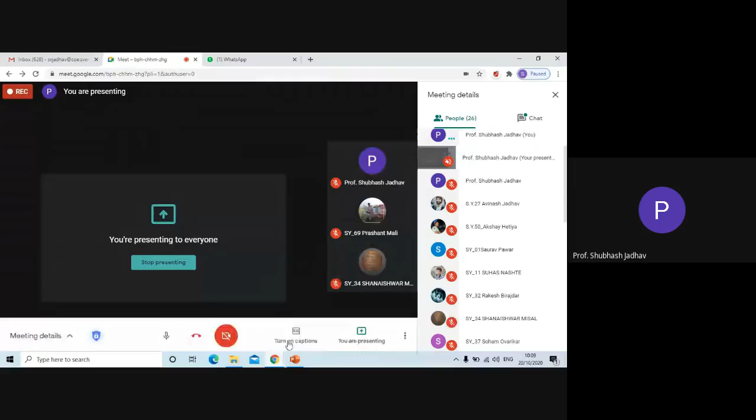So basically, in the previous lecture, we have discussed CI engine combustion, and we are going to continue. But before moving ahead, there were some students saying that due to network problem, they were unable to hear me completely in the previous lecture. So let us revise what we have discussed earlier, and then we will proceed.

So, the combustion in CI engine is our chapter number 6. Basically, this is what the combustion is, which we have already learned. It is a hydrocarbon fuel. With the help of oxidant, it is being oxidized, and the products are carbon dioxide and water, liberating some amount of heat which we require for conversion into work. So it is being represented as CH4 + 2O2 → CO2 + 2H2O + heat.

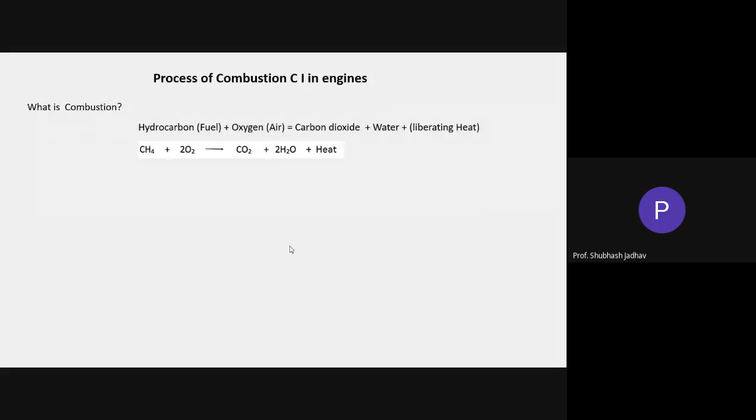There are some requirements for the combustion to happen in CI engines. Being CI engine, presence of hot air in the combustion chamber is the first requirement. And in order to achieve this first requirement of hot air, we have to use sufficiently higher compression ratio of more than 16:1. So here we mean to say we require hot air in the combustion chamber.

Now, why we require hot air? Because we are not providing separate ignition system in CI engines. Since we are not providing separate ignition system, in order to ensure that the fuel whichever is going into the combustion chamber is going to burn, we have to ensure that the air inside the combustion chamber is hot enough.

To what extent? To the extent that whenever we spray the fuel into the combustion chamber, it is going to burn automatically, self ignition. Since it is supposed to burn on its own, auto ignition has to happen. The air temperature has to be above auto ignition temperature of the fuel. So we have to increase the temperature of the air to a very high level, and for this, we require very high compression ratios above 16:1. That is the reason why we generally use higher compression ratios in CI engines.

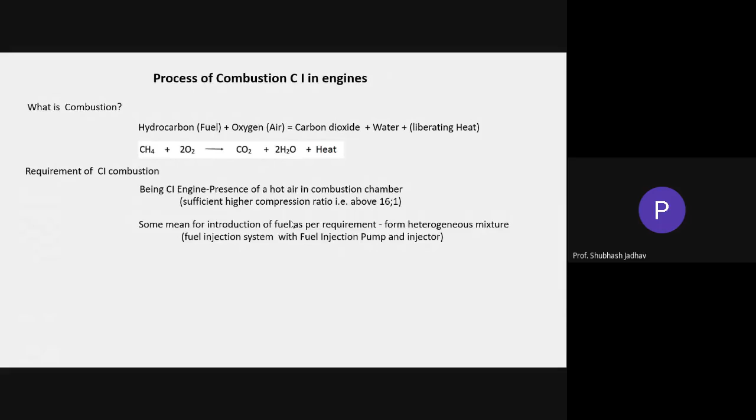Some means for introduction of fuel as per requirement. And this forms a heterogeneous mixture. So, since we are going to introduce fuel into the combustion chamber, we require some system to introduce the fuel. We are not going to pour it into the combustion chamber. In a systematic manner, we have to ensure that it is going to be introduced. What systematic manner is required? We want it in the form of atomized fuel, small droplets of the fuel.

When we say small droplets, we require a system which ensures that the fuel is being broken up into small droplets, and that is where you have the fuel injection system. We have discussed fuel injection system for CI engine in chapter number 3 in detail, wherein we have understood how the fuel injection system for CI engine works with a fuel injection pump and injector, etc. And we have also discussed that we will be having a heterogeneous mixture.

And what do you mean by saying heterogeneous? When we say it is heterogeneous, if you take different samples from the different corners of the combustion chamber, the amount of fuel and amount of air in these samples will not be same for all the samples. And why it is so? Because the mixture is heterogeneous.

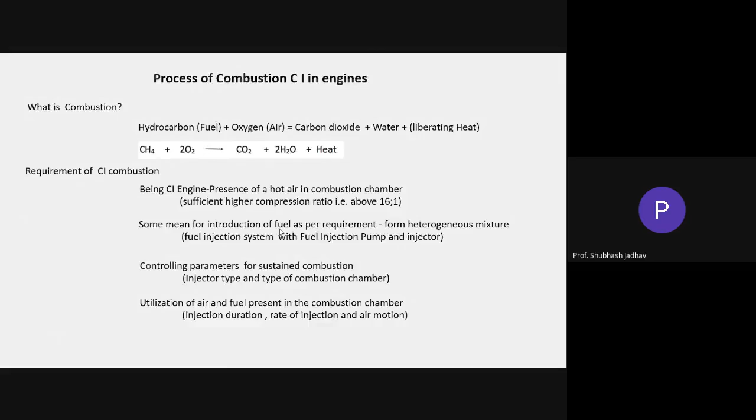Then the air motion. Whenever the air moves inside the combustion chamber, the mixture forms properly, because in CI engines the mixture formation happens inside the combustion chamber, and therefore air motion is required. So proper motion is imparted to the air so that a proper air-fuel mixture is formed. These are the different requirements of combustion in CI engines.

A normal combustion happens in CI engine. Let us see how it happens. We know that we have a heterogeneous mixture, because we are spraying the fuel into the combustion chamber, and while spraying we are unable to ensure that all the fuel is equally distributed throughout the combustion chamber, because we have a mechanical system to spray the fuel, and the spray pattern is not similar to the combustion chamber shape. Therefore the fuel reaches different parts in different quantities, and the mixture is heterogeneous.

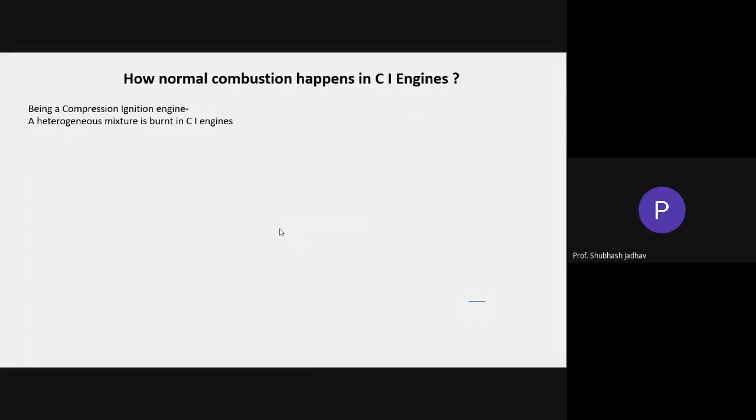And this is how the P theta diagram, that is the pressure crank angle diagram, for a CI engine looks like. We have already discussed the P theta diagram for SI engines. For normal combustion, the basic difference starts from the induction, that is the suction stage. During the suction stroke in CI engines, we are only sucking in air, unlike in SI engines, where we introduce the air fuel vapor mixture.

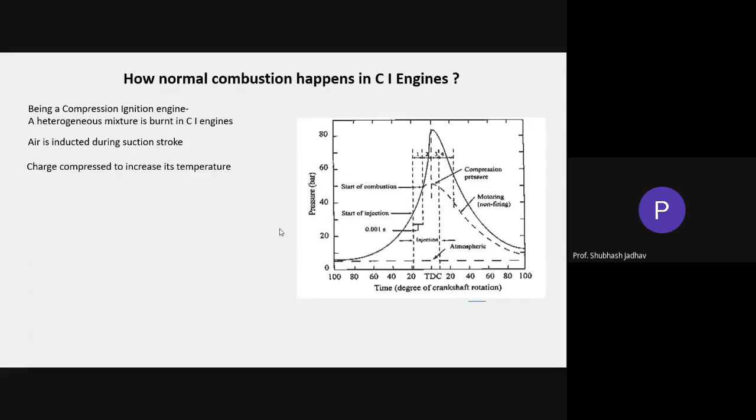So here only air is introduced, and then the charge is compressed by the piston in the cylinder. The piston moves from BDC to TDC, and as it moves, the volume decreases, so the air is compressed and the temperature increases. At the end of the compression stroke, as the piston reaches near top dead center, we inject the fuel.

Here the fuel droplets burn independently, which means every droplet is burning independently. In SI engines, we have a uniform mixture throughout the combustion chamber, and continuity was very important. Since there was continuity in the mixture, once we ignite it at any corner of the combustion chamber, the whole mixture burns because the flame travels.

Here, the flame cannot travel because there is no continuity; the air fuel mixture is not continuous, it is not homogeneous, it is heterogeneous. Due to the heterogeneity, that is discontinuity in the availability of fuel, the flame will not be able to travel throughout the combustion chamber. Therefore, if one fuel droplet burns, it is not necessary that the next droplet is also going to burn.

That is the reason we have ensured initially that the temperature of the air is higher than the self-ignition temperature of the fuel. When the fuel is injected as droplets, every fuel droplet is surrounded by air having a temperature higher than the self-ignition temperature.

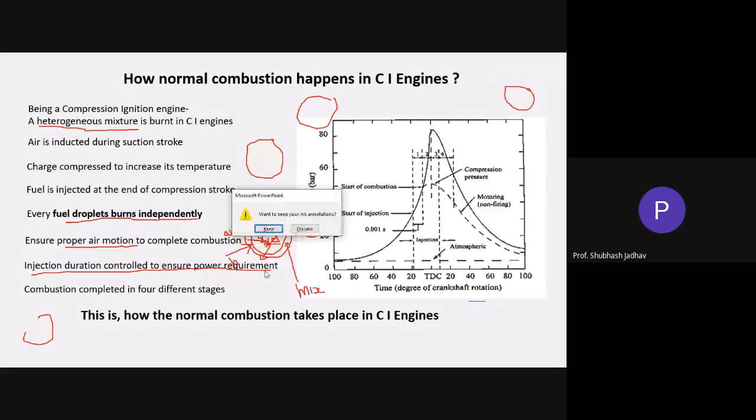Can anybody confirm with me? Can anybody confirm with me? Yes. Can anybody confirm? Yes. Yes. Okay.

So, expecting that everybody has understood everything, whatever has been discussed, we will proceed then.

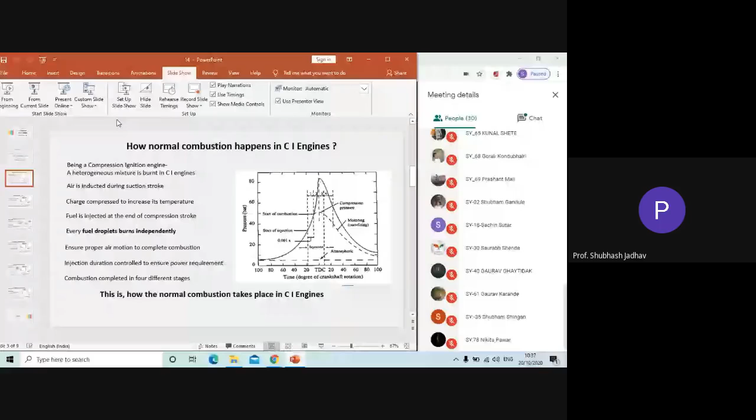Now let us talk of different stages. We have 4 different stages, as we said. The first stage is from A to B. A to B we call ignition delay. In SI engine, we call it ignition lag. Here we are calling it ignition delay period. We have the second stage, which we call rapid combustion stage or uncontrolled combustion stage.

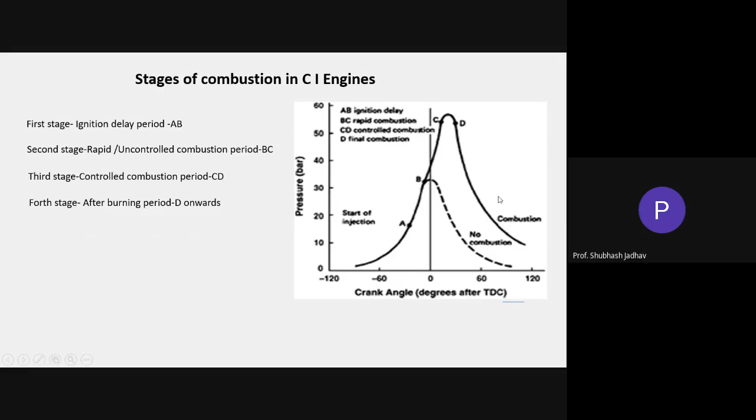From B to C. We have a third stage, which we call controlled combustion stage, that is C to D, and we have a fourth stage after point D, which we call afterburning stage. So A to B, ignition delay period. B to C, rapid or uncontrolled combustion stage. C to D, controlled combustion stage, and fourth, afterburning stage. So these are the 4 stages in which combustion in CI engine happens.

The question in the exam will be something like this: Explain with a P theta diagram the combustion process in CI engines. Then you have to draw this figure, mark all these points, list all these 4 stages first, and then one by one explain every stage in detail, what is happening in every stage. So these are the stages of combustion in case of CI engines.

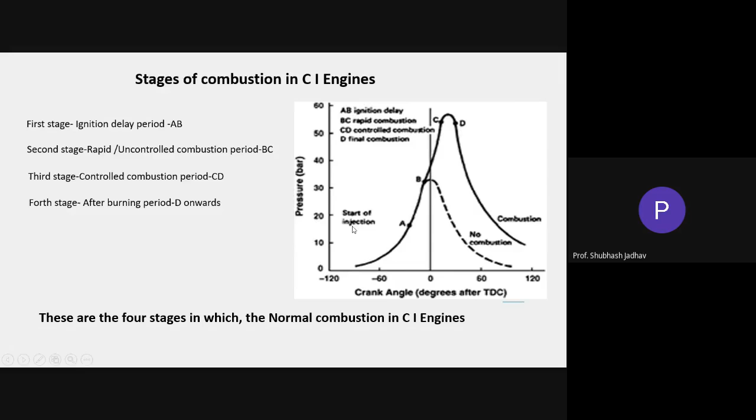So let us now see what happens in different stages. The first stage, as we have just said, we are calling ignition delay, unlike in SI engine, where we call the first stage ignition lag. It is from A to B. What is point A? Point A is the start of injection point. And what is point B? If you see the figure, point B is the point where the combustion curve departs from

your motoring curve. In SI engine, the first stage was from the spark point to the point where the combustion curve departed from the motoring curve. Here, point A is the start of injection. See here, this is top dead center. Nearer to top dead center we start the injection; we are going to inject the fuel. So at point A, we have started the injection.

Okay. And point B is when the combustion curve departs from your motoring curve. At that point, we have the end of stage number 1. And this stage is called the ignition delay period.

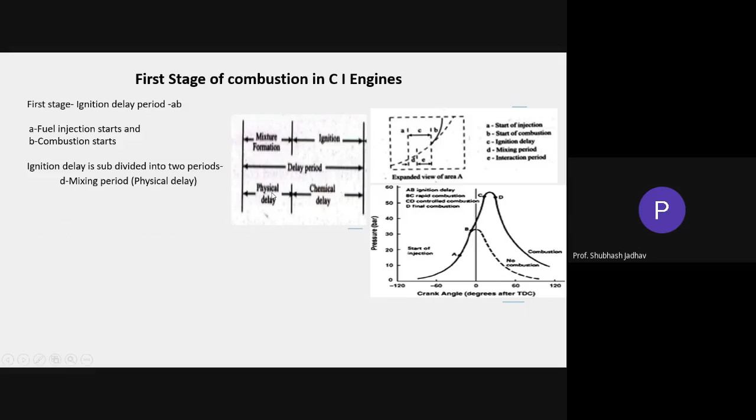Okay, the first part is called the physical delay period, and the second part is called the chemical delay period. The ignition delay period is subdivided into two parts. One is the physical delay period, where the mixture is formed. So mixing, or formation of the mixture, happens over a particular amount of time, because you have introduced a droplet.

You have introduced a droplet into the combustion chamber, but it is in liquid form now, isn't it? So if it is in liquid form, can it burn? Obviously no. This liquid fuel cannot burn; before burning, it has to form a mixture. And to form a mixture, the fuel has to diffuse out and air has to diffuse in. Only then will you get a mixture.

So here we have a droplet going into the combustion chamber, and it is liquid fuel now. The outside layer is initially going to form a mixture. Why? Air is going to come in, fuel is going to come out. They are trying to diffuse into each other, and therefore a layer of air-fuel mixture is formed on the surface of the droplet.

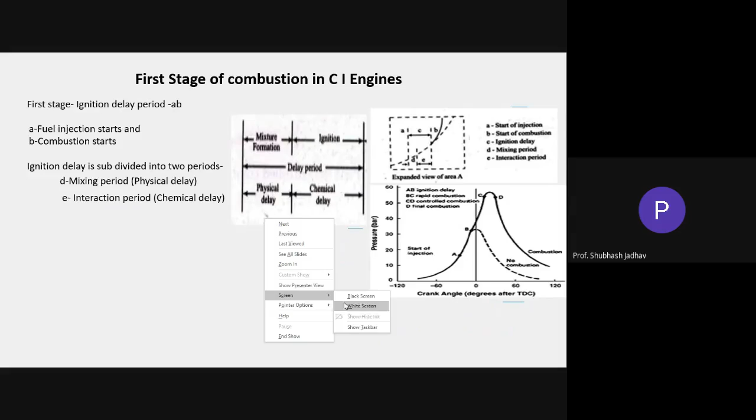So once it goes inside, the fuel will try to diffuse out and air will try to diffuse in. Here we have one droplet, with a layer of mixture on its periphery. This is the mixture, and this is the liquid fuel. So here we have liquid hydrocarbon fuel, and here is the air-fuel mixture. Somewhere one molecule of this air-fuel mixture starts burning, but all this mixture has to catch fire.

Mixture burning, then and then only it can result in production of heat. So that particular period when this flame is going to form inside this mixture formed around the droplet is what you call the chemical delay period. So we have two periods: one is a physical delay period and one is a chemical delay period.

During physical delay, the mixture is being formed. Mixture formation is going to happen. How does the mixture formation happen? We have a droplet inside the combustion chamber. Fuel is trying to diffuse out, air is going to try to diffuse in. Therefore, at the boundary of the droplet, you are having a layer of mixture. So the inner layer is liquid, the outer layer is air-fuel mixture now.

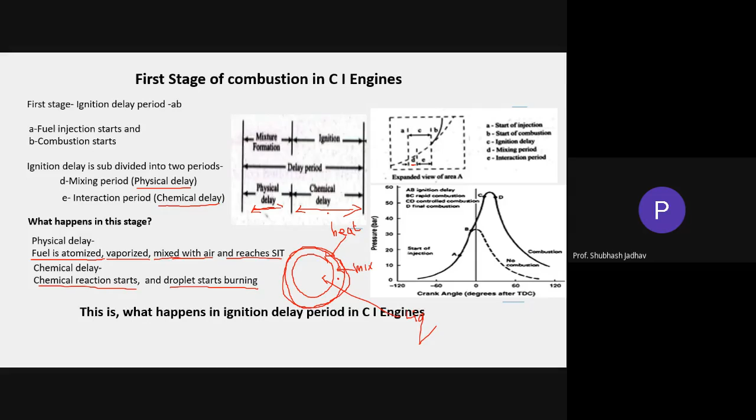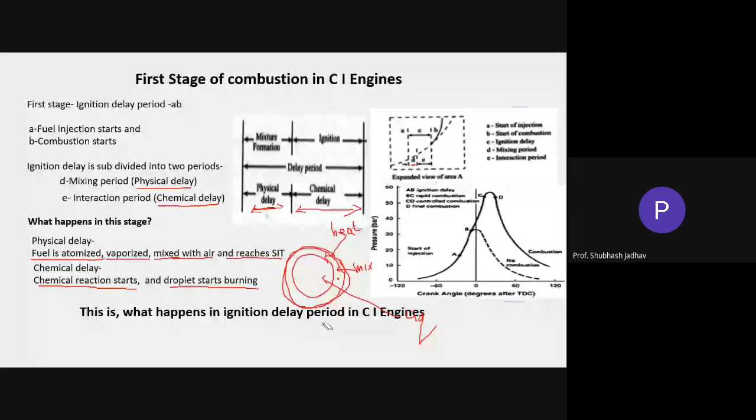Can I get confirmation? Yes, sir. Can I get confirmation? Yes, sir. Understood. You have doubt or you understood? You understood? Hello? Yes, somebody. Once again. Yes. Yes, understood everybody. Anybody having any doubt, please ask. Once again, I will explain.

This is the first stage, starting from A to B. Point A is the start of injection, till point B, which in one word is the start of combustion, or where the combustion curve departs from the motoring curve. Between A and B is your ignition delay period. In SI engines we call it the ignition lag period; here we call it the ignition delay period.

This complete ignition delay period has been divided into two parts, because some physical things and then some chemical things are happening. One is the physical delay period, and the second is the chemical delay period. In the physical delay period, fuel is atomized, vaporized, mixed with air, and then reaches self-ignition temperature.

All these things happen during the first substage of the ignition delay period, which we call the physical delay period. The second stage is the chemical delay period: the chemical reactions are starting, and the droplet is going to start burning. So that is where we call this the

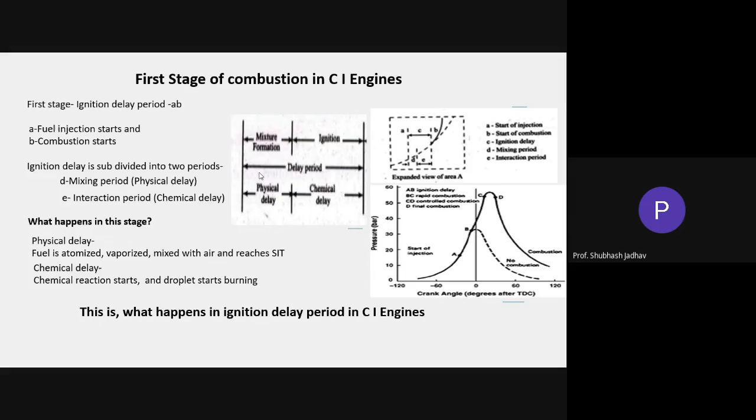Okay, so since no doubts are being asked, I assume that you have understood.